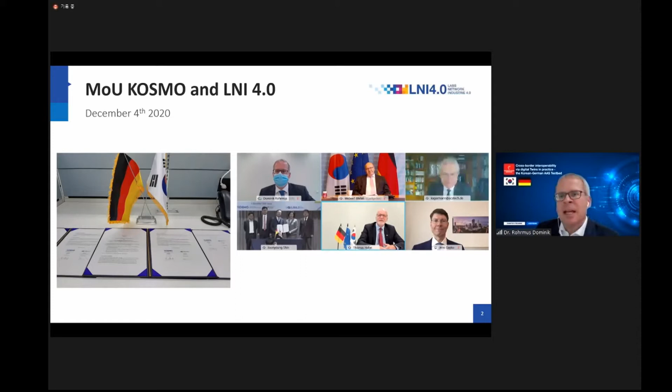With this overview, I show you briefly that we finalized that in the form of a memorandum of understanding, which was signed in December last year electronically. And we were very proud and humbled that also the ministers of both countries, the economy ministers, took place in that signing ceremony. Thank you very much for attending today, and I hand over back to Professor Hong.

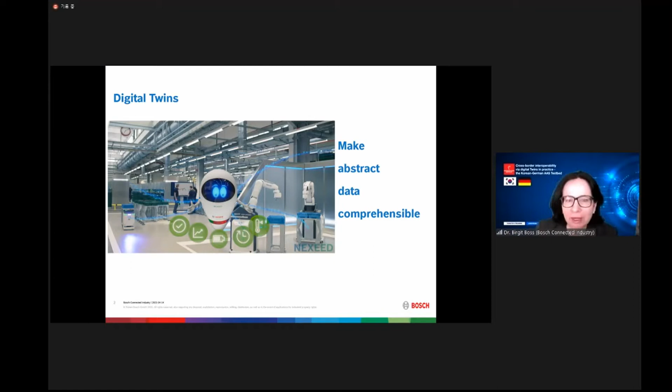Have a look at a typical factory or production line today. You have a lot of machines in your factory. You have a lot of robots from different suppliers, automation systems, vehicles, whatever. And all these different machines produce data, and they produce it in a very heterogeneous way.

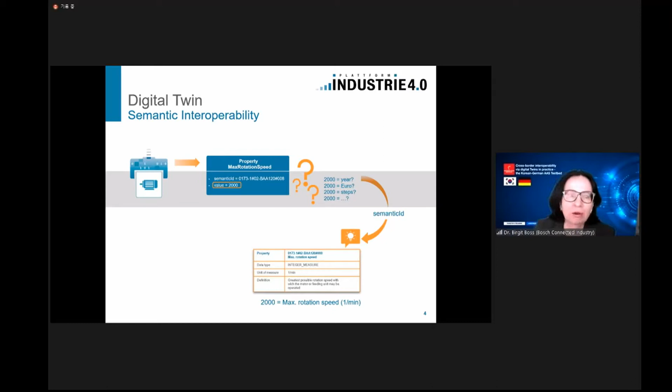And when you look up this ID in the dictionary, you will get the following information. You will learn that it is the maximum rotation speed. You will learn that it is measured in rotations per minute. And you will also get a definition. Here it's the English definition, but you might also get the Korean definition or the German definition, whatever language you need. So this is how we put semantics to data.

And I think Dominic already said it. So the asset administration shell is the implementation of the digital twin in Industry 4.0. And if you want to implement a digital twin, you may ask yourself which standard to use and where to get support to also implement it. And so I'm very happy that last year it was driven by Platform Industry 4.0 to give a kind of home to the asset administration shell and to give such support that is requested by the users of the asset administration shell. So the goal is to have exactly a one-stop shop for the digital twin, and this is why the Digital Twin Association was founded.

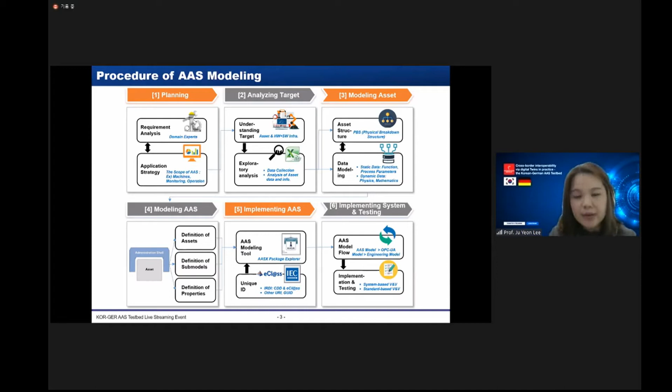Let me explain how to implement AAS from the AAS modeling point of view. I've defined 6 steps for the AAS modeling. First is the planning to determine the scope of AAS, and then it's important to investigate the target asset and their data collection infrastructure, including hardware and software. Based on that, we can generate the model of an asset itself, including structure and static data model and so on. After that, we can also generate the AAS model and implement those models using the AASX Package Explorer. And lastly, the system can be implemented based on AAS, and the AAS model should be verified and validated. Actually, I can't explain each step in more detail here, but I want to emphasize that investigating an asset itself before modeling AAS is very important.

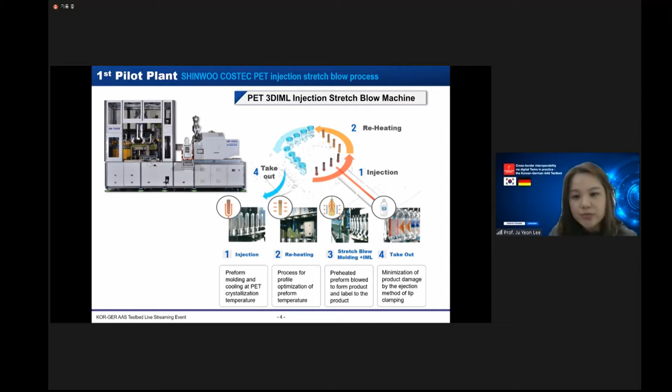So for this project, we have 2 pilot plants. So the first plant is Shinwoo Costec, which has the PET 3D IML injection stretch blow machine. So this machine consists of 4 main processes: injection, reheating, stretch blow molding and labeling, and lastly takeout.

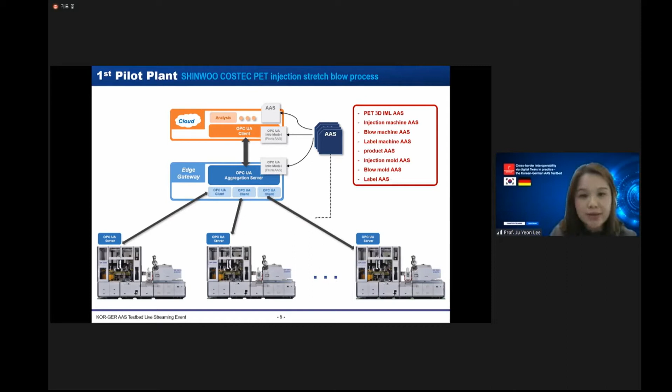And this AAS-based data collection system was implemented on the real shop floor of Shinwoo Costec. So they are now using our system for real-time data monitoring. And our second plant is Huons. So we applied our system to the ampoule manufacturing process of this pharmaceutical company.

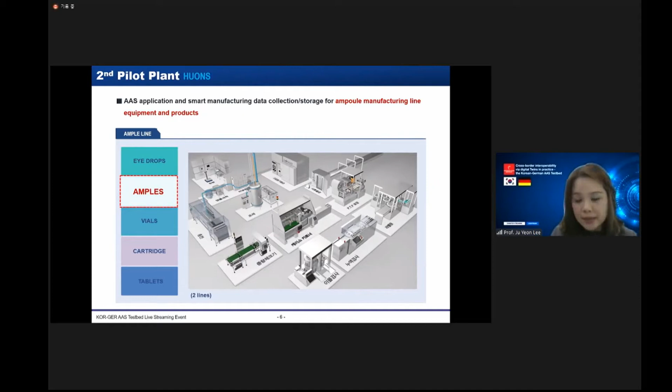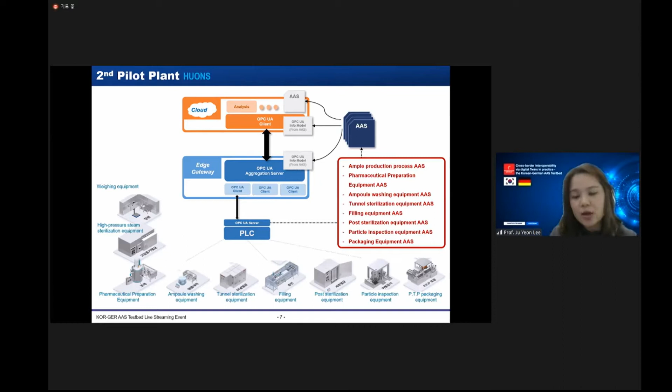So we generated these AAS models of main equipment in this ampoule manufacturing process, such as pharmaceutical preparation equipment AAS or ampoule washing equipment AAS and so on. So in this presentation, I introduced our project and our two pilot plants very briefly. So if you have any question, you can join our Q&A time.

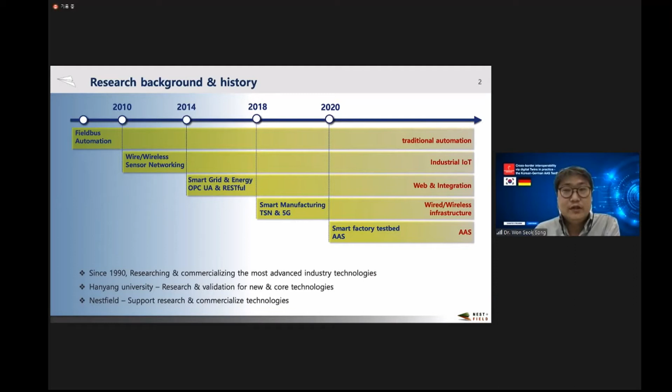Hello, everyone. My name is Won Seok Song, and I am managing R&D in Nestfield. As you see, we have been researching industrial automation technologies. Hanyang University verifies the core technology, and Nestfield commercializes it. We recently published a remarkable research achievement related to Industry 4.0. We have focused on smart manufacturing core technologies such as AAS, OPC-UA, TSN, and we are verifying the feasibility using a plug and produce scenario.

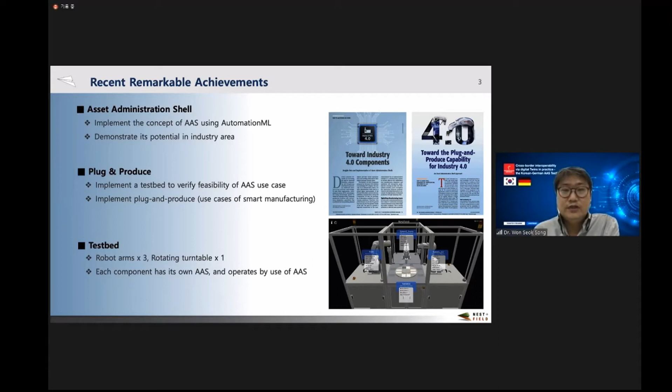Plug and produce is one of the adaptable factory scenarios defined in IEC TC65 Working Group 23. The adaptable factory scenario explains a flexible production line that can be reconfigured during runtime. Like the plug-and-play concept for desktop computers, the vision is to have plug-and-produce capability for future production lines.

In operation mode, a pair of robot arms are working pick and place. In PnP mode, one of the operating robot arms is plugged out and one robot arm is plugged in to replace it. And then new robot arms are executing the pick and place task on the turntable. During this process, the AAS of robot arms and turntable will communicate to determine the operation of corresponding assets.

However, we will have a lot of other user activities, and here Birgit Boss already introduced IDTA, the Industrial Digital Twin Association, and our idea is to take the technology and also to take up the content definitions in form of submodel propositions from the IDTA, and then have a look again also at the IEC and ISO, which of these submodels could even be standardized in an international way.

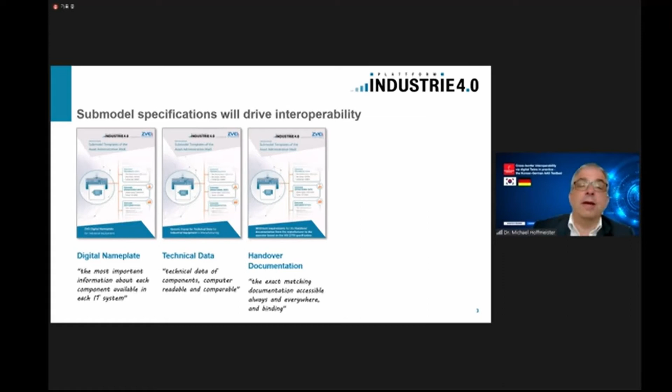But now let us talk about these submodel specifications. We already have some of them available, and Professor Lee was already so kind to introduce them to you. We have for identification the digital nameplate submodel description; for describing technical data such as data sheets in multiple languages and so on, we have the technical data specification; and for the important topic of documentation and certificates, we have a way to interoperably convey them along the supply chain by using the handover documentation submodel.

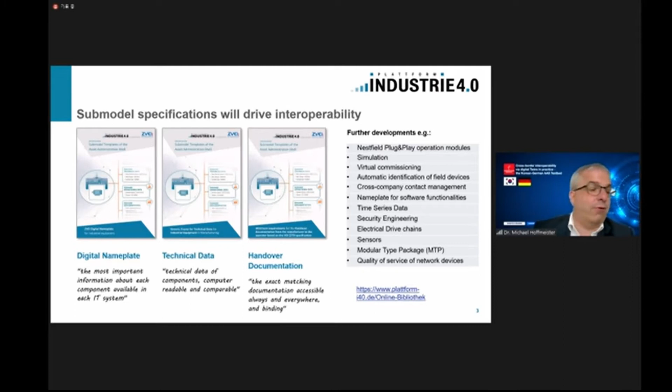However, we are doing a lot more. You have just been introduced by Dr. Song to the operational modules you have seen in the Nestfield demonstrator. We are working on submodels for simulation, for virtual commissioning, and a lot more. Many of them will then be published in the online library of Plattform Industrie 4.0, in the IDTA organization, and also via the IEC.

How can you now join this commitment and this development? We are providing open source technologies for you. We have a central information place here on GitHub where you can go and find a lot of different software development kits. You find there more than 30 examples for asset administration shells, screencasts, binary versions of our editor, for instance, but we also have a server, Docker container, security provisions, and much more.

And last but not least, I want to give you an impression of how this editor works. Here, I'm now starting the activities, and I'm starting to download an asset administration shell directly from the machine, this small production model. I'm going into the documentation. The documentation is available in multiple languages, and the documentation is already included in the asset administration shell. You don't need to search for it on the internet. Everything is in one place.